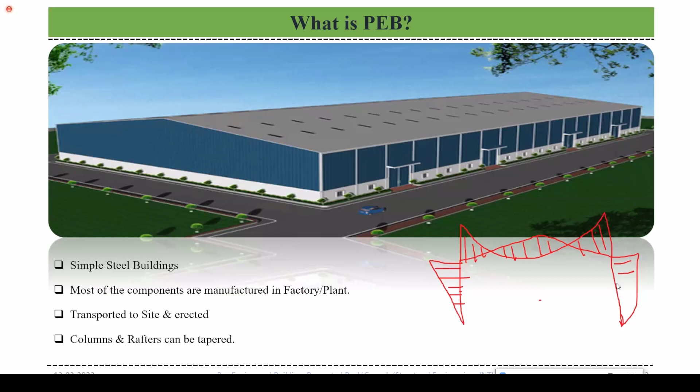Suppose I am taking a 2D frame structure like this. So for dead load, the bending moment of the structure will be like this. The shaded area is the bending moment diagram.

According to this, the PEB column or rafter will be designed. For example, here the bending moment will be much lesser, so the section starts with a lesser depth. Here the bending moment is more, so the section size will be increased like this for a column. For a rafter, the bending moment is more here, and more here.

So you can assume a simple PEB structure has a shape like this. This is about PEB, compared to the conventional steel structure where all columns and rafters are straight. They use hot rolled beams or straight sections, which are heavier compared to PEB.

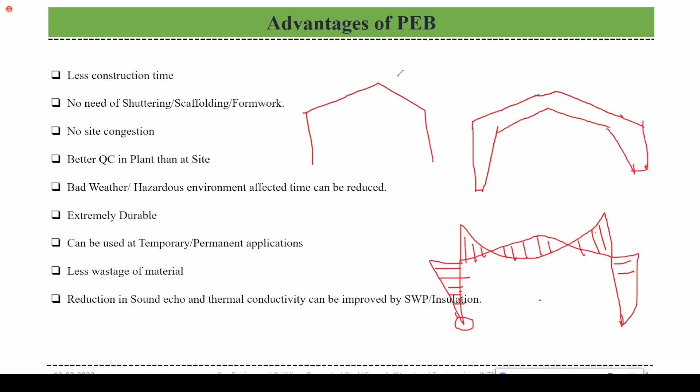Next, the advantages of a PEB structure. The first advantage is less construction time. Most PEB components are manufactured in a plant or factory, then directly transported to the site and erected using simple connections.

But in RCC, temporary shuttering, scaffolding, or formwork will be done, then concrete is laid, and there is time needed for setting of concrete. In PEB structures, there is no time needed for any setting, so there will be less construction time compared to RCC structure.

The other point is no need for shuttering, scaffolding, or formwork. No temporary structures need to be erected for setting any PEB component, because all these components are made in the factory only and erected directly. There will be no site congestion.

As you can see locally, there should be some aggregate and cement bags, there should be some site setup. But in PEB structures there is no site congestion, because components come directly from the plant and are erected. Better quality control can be done in the plant than at site, so there is no worry about supervision at site since all components are made in the factory itself.

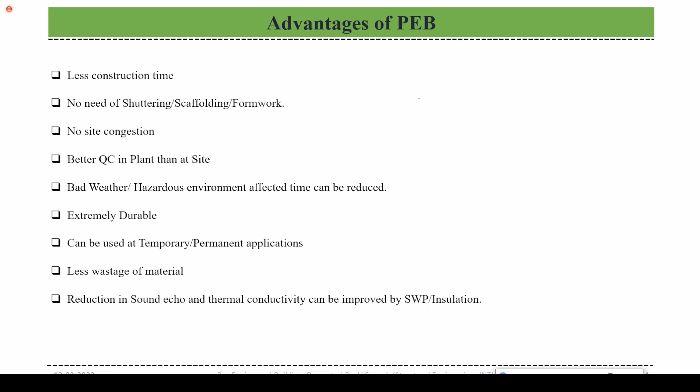The reduction in sound echo also has been improved. Generally if there's any sound in a steel building, people think there may be resounding echo that isn't pleasant to the ears. But this reduction in sound echo can also be improved by sandwich panels or insulation.

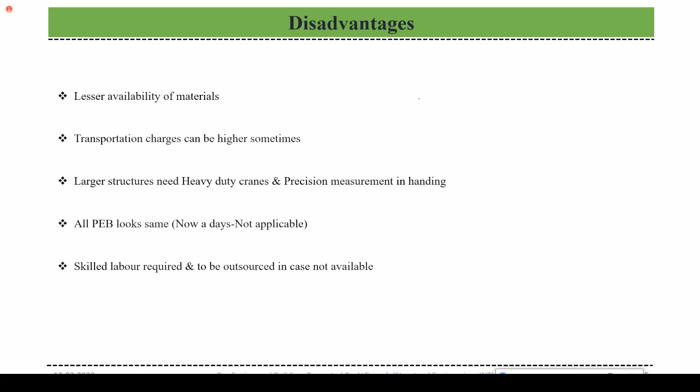The last point is that skilled labor is required and must be outsourced if not available. In an RCC structure, all kinds of labor may be welcome there. But here, for erecting the steel building, we need skilled labor, because he has to measure precise dimensions while connecting the bolts—connecting the column to the rafter or crane beam to the bracket. He has to be much more skillful than the labor required in RCC buildings.

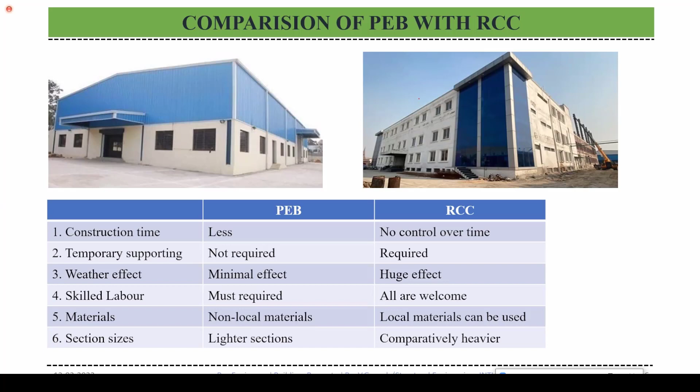And the main point is the section sizes. In the PEB building, as I told you, it is nothing but frames. We have to design according to the bending moment diagram. Where there is more moment, the section may be higher, and where there is less moment, the section may be lighter. So in PEB, we design according to the bending moment diagram, so all these are lighter sections, whereas in RCC, all are straight. You can see many RCC structures, so these are comparatively heavier sections.

So what are the different types of PEB structures available in our market? First is called a rigid frame. You can see only two columns on both sides and one complete clear span rafter over these columns, so this frame is called rigid frame. For this rigid frame, maximum practical width or clear span can be 60 meters. You can see the taperization of the column or rafter.

I think everyone is following, right? Yes, sir. Fine.

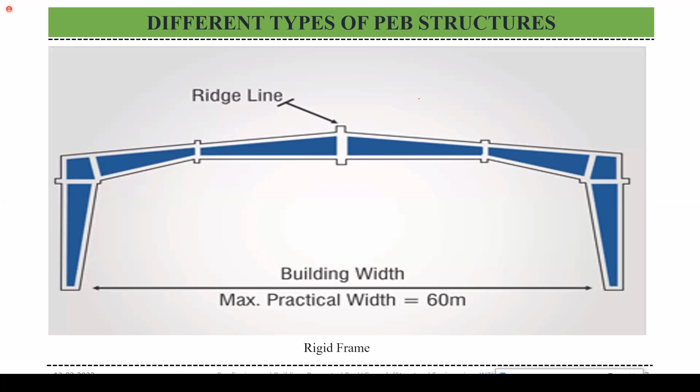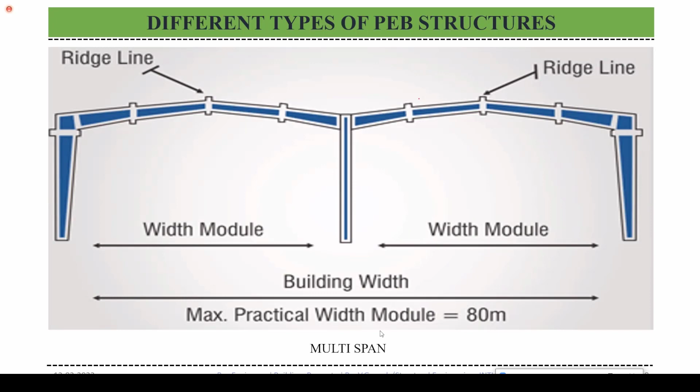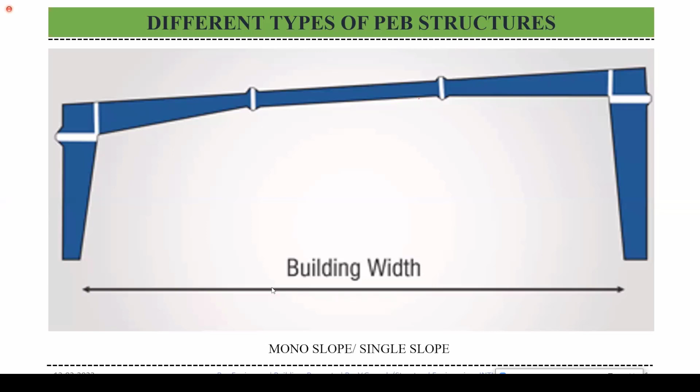And here is the monoslope or single slope building. Generally, some slope certainly has to be maintained in a PEB structure. If you see all these structures, all the rafters will be laid at a particular slope, you can observe here. Why do all these structures have to be laid at a slope? Because we have to drain the rainwater. In case rain comes, we have to drain the rainwater to a particular slope - there may be some gutters and downspouts, which we will learn later in other classes. So we have to drain the water from the higher portion to the lower portion. Therefore, according to some particular codes, minimum 4% roof slope has to be maintained in a PEB structure. This is called single slope because there is no other slope, only slope on one side, so you call it monoslope or single slope building.

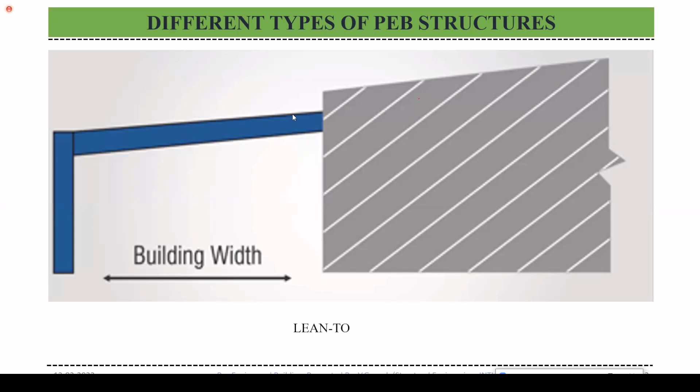Another one is a roof system. Roof system is nothing - previously we have seen a complete building with steel, but here you can see these columns are with RCC, and they have simply provided a rafter over the RCC columns. So we are providing only a roof system here - there are no columns or girts, anything. We are providing a rafter along with purlins and sheeting above, so you can call it a roof system.

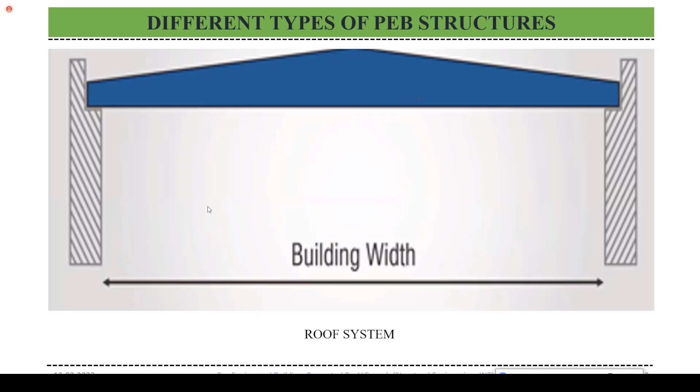This is a familiar structure most of you know, because if you go to a petrol bunk and look technically at the structure, you can observe this. This is called a T canopy because it has the shape of a T, though most people call it a Y canopy - but the correct technical word is T canopy. The column is fixed at the base and there are two rafters on either side of the column. This is generally observed in parking lots, petrol bunks, and railway station platforms.

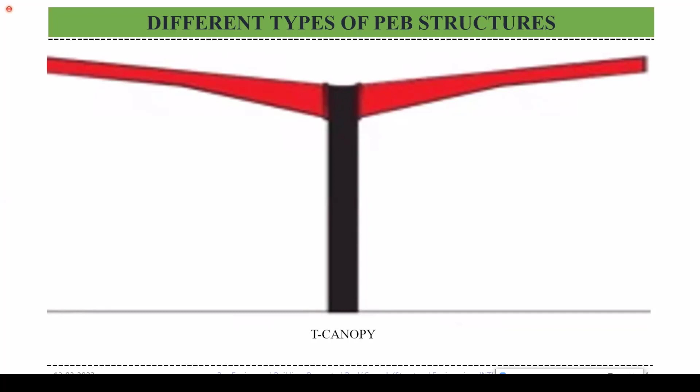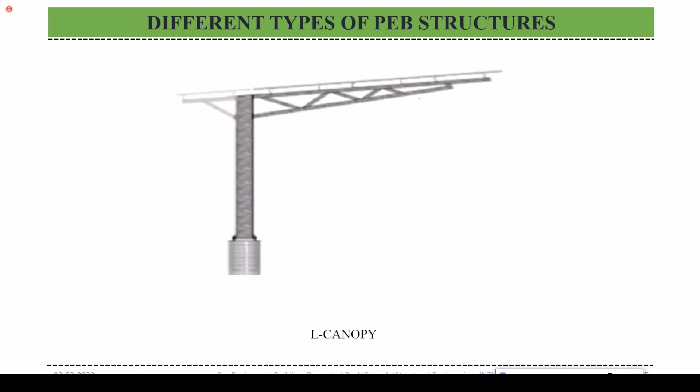If there is only one rafter fixed on one side of the steel column, you can call it an L canopy. You can observe this generally in bus stands and railway station platforms.

The last one here is the flat roof structure. The terminology itself indicates it has a flat roof. The flat roof will be laid with concrete, as you all know. So most of you probably doubt - if it's concrete, where is the purpose of steel? That's the thing we'll address.

You can see brown color lines here - these are the frames, nothing but flat roof frames, we can call them. You can see my cursor here - these are the joists, some you can see truss-like structures. These are the joists, simply supported between these two beams. Nothing but mezzanine frames - you can call them joists.

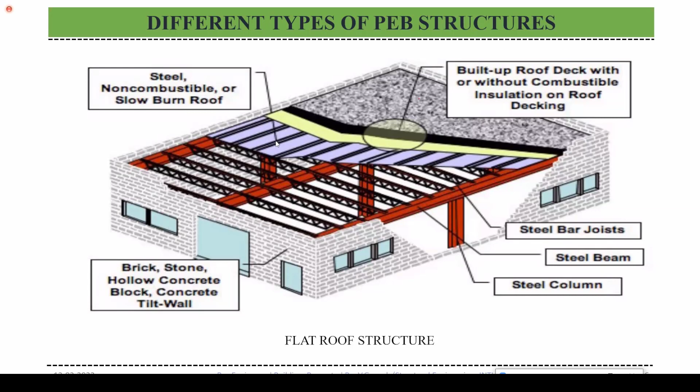Over that, there will be a deck panel. Generally in RCC structure, before laying concrete, RCC contractors will provide a deck sheeting, decking. So similarly in this case, we provide a deck sheeting. Here you can see the line of the deck sheeting - they've cut a section here, you can observe this is the deck sheeting. But in RCC structure, after the concrete sets, they remove the decking. In the steel building, they keep it as is, because they pour concrete directly over the deck sheet. This is simply called a flat roof structure.

These are the different components involved in making a PEB structure. The first one is the frame - I think all of you have seen different types of frames: rigid frames, beam column frames, single slope, flat roof, and all these are frames. This has to be connected on site using base plates with anchor bolts, and a column and rafter has to be fixed with a connection plate. So all these components, and then third one, purlins or girts and struts.

What are these purlins, girts and struts? We'll see in the next slide. Next, bracings, roof and wall sheetings, flashings, and miscellaneous accessories like skylights, wall lights, doors, windows, louvers, roof fan curbs, ridge vents, roof monitors, etc. What are all these? I'll tell you in brief. And building additions like fascia, canopy, mezzanine, crane, internal structural partitions, etc. I'll show all these in a particular practical building so that you can recognize them whenever you see them.

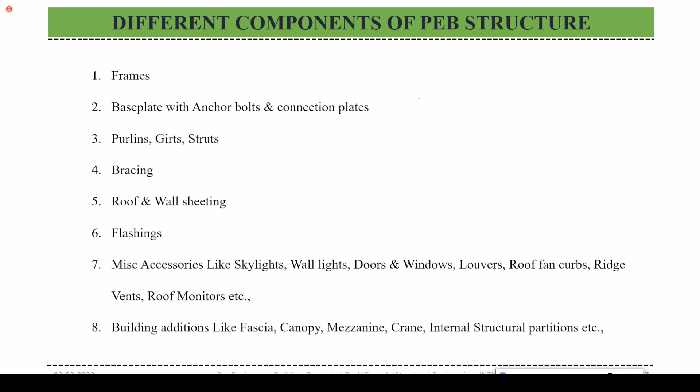So this is a purlin or girt section. You can see here it is like a Z section. Why do we need to use Z sections? Most Indian contractors or consultancies will use C sections also, but most people will use Z sections. What is the purpose of using Z sections? Because at the end of these sections - why I'm talking about the ends - you cannot transport, suppose if there is a 120-meter or 100-meter length building, you cannot transport a 100-meter length purlin entirely directly to site from the plant, because that much length of transport may not be available.

So you have to send them in pieces, some particular 9 meter or 12 meter length pieces, to the site. So if it's a Z section, at the end of the section you can directly lay another Z section over it - you can visualize the end of the section for lapping. Technically we call it lapping at the end of the Z section. If you want to carry it to the other frame, you can directly lay a Z section over this, so that you don't disturb the connection. And then this will be called a strut - a strut is nothing but, I'll show you.

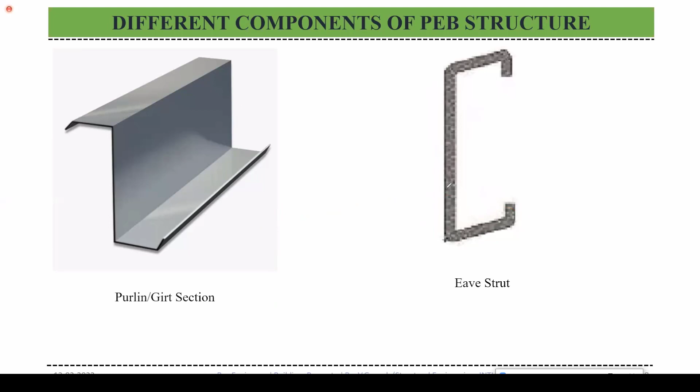The next component will be bracing. What is the purpose of bracing in a PEB? Bracing is a component which is used to transfer lateral forces only. What are the different types of lateral forces generally found in a PEB building? We'll see in the later stages, but as of now, you can say wind force.

Suppose through the length of the building, how can the wind force be transferred? This wind force can be transferred by using the bracings, like that you can see. And I have told you there is strut here, at the top of the rafter, we can say that as strut at the complete side of the building. There are two types of bracing: generally we use diagonal bracing and knee bracing, and the other one is portal bracing.

So what is diagonal bracing? You can see here, you can use some rods, solid sections like 16mm, 20mm, 24mm rods, or cables as diagonal bracings. Otherwise, if there are any particular doors, if there is a rod bracing, you cannot enter into the particular structure, so we cannot use rod bracing if there is a door. We have to go for portal bracing. This is the portal frame bracing, we can call it. We have to use portal frame bracing in case of any doors, etc.

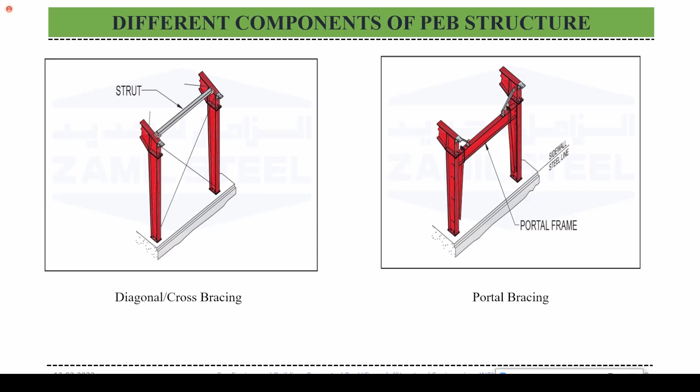I think most of you know what a sandwich burger is, right? There is a bun below and a bun above, and there will be stuff in between, like most people eat it. So like that only - there is a top skin and a bottom skin and an insulation panel in between them, so we can call it a sandwich panel.

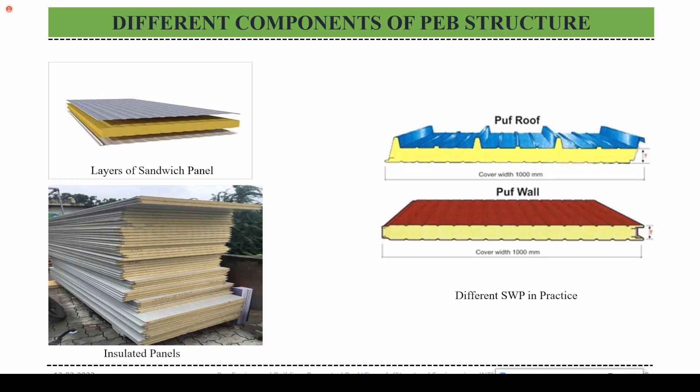Otherwise some people will use only a top skin, and without a bottom skin you can directly use an insulation panel. That is a client's preference. And there are some miscellaneous other components in a PEB model.

And I have told you there are some flashings. Suppose there is a wall sheeting here and a roof sheeting here, we have to cover this joint, right? We have to cover the gap between wall sheeting and roof sheeting, so we have to put a miscellaneous trim or flashing so it can cover the gap between wall sheeting and roof sheeting. Likewise, the side wall sheeting and end wall sheeting, we have to cover the gap. All these can be called trims or flashings.

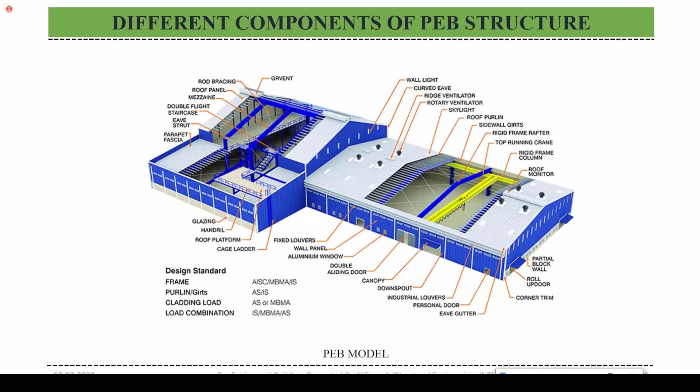So there is some portion of building going over the roof. You can call it fascia, because generally in PEB structures there will be a triangular gable portion. But most people did not like this triangular portion, because it can be simply identified as a steel structure or PEB. So to cover this gable portion, we extend the sidewall portion up to roof height, which is known as fascia. So if you see any side of the PEB building with fascia, it looks like a simple rectangle building. You cannot observe any gable or triangular portion if it is having fascia.

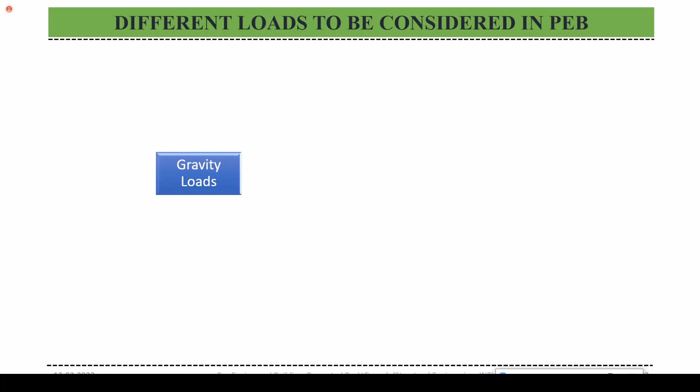And then what are the different loads to be considered in a PEB? There are three types of loads mainly considered in a PEB. First one is gravity loads, the second one is lateral loads, and the third one is self-restraint forces.

So gravity loads, I think all of you know. As a civil engineer, you have to know what are the gravity loads. There are certain loads that come under gravity loads. The first and main component here is dead load. In the case of a PEB structure, what are the components that tend towards dead load?

First of all, the higher portion of the PEB building is the roof sheeting, so there is some particular weight for every sheeting. The next portion is purlins, generally used to support the sheeting. So we have to consider the load for sheeting as well as purlins, and the weight of these two can be considered as dead load. And the main other thing is self weight of the structure itself, nothing but self weight of the frames or columns.

And then the other thing, live load. This is the next main component in gravity load. There will be some maintenance for every PEB building; they should be properly maintained and corrosion proof, because we need more durability. So we need to paint it thoroughly, so for maintenance some men will take care of the work. For that, we need to add live load. Generally in a PEB structure, the live load ranges from 60 kg per meter square to 100 kg per meter square. How this live load can be applied, we'll see in the design in the next lecture.

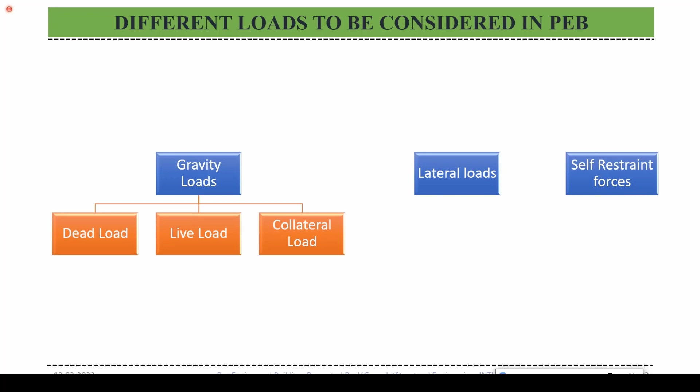Next, coming to lateral loads. What are the lateral loads? Generally we observe lateral loads in a PEB structure, first the main thing is wind load. Generally in case of RCC, up to G+2 or G+3 structures, we do not consider any wind load. But in PEB structure, for any building with any height, maybe 2 meters, 3 meters, 10 meters, 17 meters or 20 meters, for any height we have to take wind load into action.

And the next thing, seismic load. This is the main difference. There will not be any seismic check generally for G+2 or G+3.

In the PEB, we will design the PEB structure according to the seismic loads also. And the last one, self-restraint forces.

I think most of you did not know about this. What are the self-restraint forces? Because in case if you take an RCC structure, there is only a huge amount of concrete and there will be steel, a lesser amount of steel when compared to the concrete. So there will not be any temperature effect there.

But generally, steel constructions or steel materials have higher thermal expansion than an RCC structure. If the temperature is more, the steel tends to expand, and if the temperature is below the room temperature, it tends to contract. So generally, all these steel components which are manufactured in plant are manufactured at room temperature itself. So in future, if the temperature is increased, what will happen?

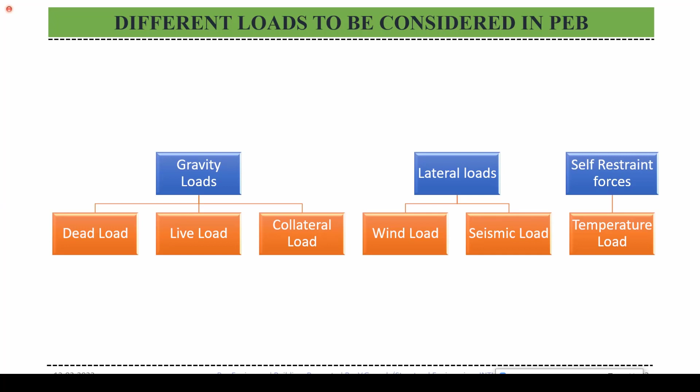So we need to take thermal stress, nothing but temperature load, into account for loading. You can see temperature load in steel structures only. You cannot see them in RCC structures. So how can the load be transferred?

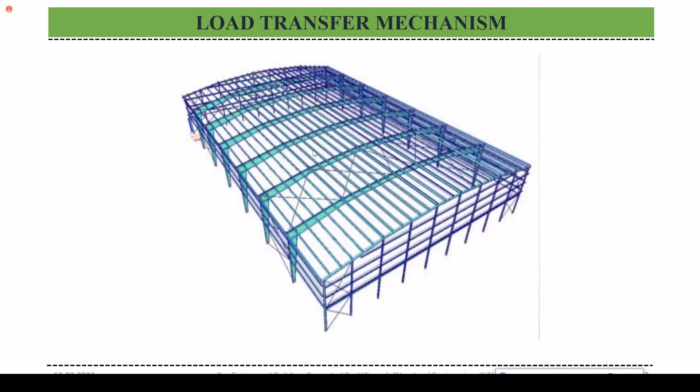But this is all about gravity loads. So what about the lateral loads? Nothing but wind and seismic. Generally wind will act in the x direction and z direction, if we take y-axis as up and x and z-axis as ground. So gravity loads, nothing but dead load, live load, and collateral load, always act gravitationally downward, nothing but y downward. But the lateral forces act in the x direction and z direction.

So these forces can be transferred by using roof bracings and wall bracings. Here you can see some X type portions are there. These, if we use them at the roof, you can call roof bracing, and if we use them at the wall, you can call them wall bracings.

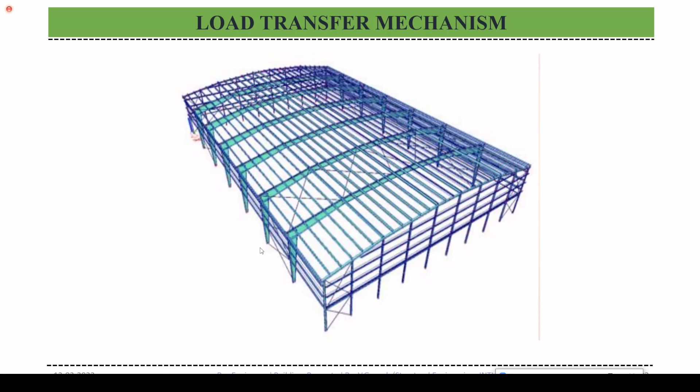And then these are the various tools available for a PEB design. The first one is StaadPro. I think all of you have basics about StaadPro in your BTech career itself. This is a structural analysis and design program which is generally used for design of any RCC or any structure. You can use it. So generally the main tool here is StaadPro.

And the next one, Staad.Pro advanced tools like Tekla Structures. This is an advanced tool which, when compared to StaadPro, can directly model, and also you can extract drawings from it. And the third one, MBS.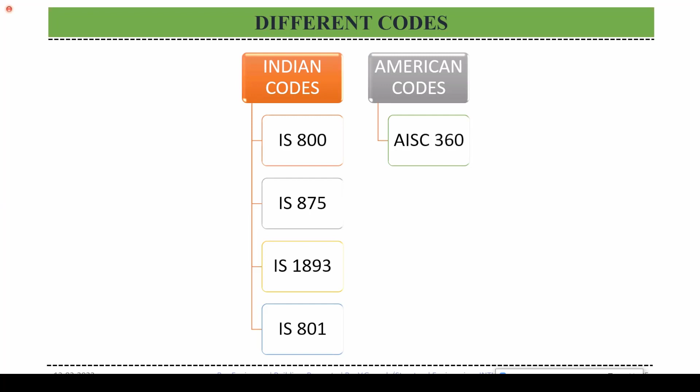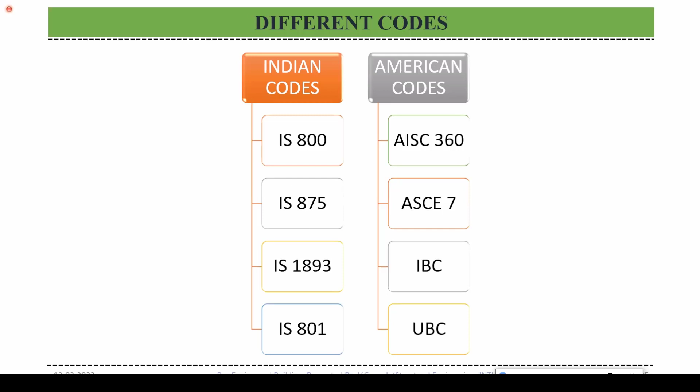There is a code for all the structural steel specifications called AISC 360, which is the design specification for structural steel buildings. Everything will be there in AISC 360. The next one is ASCE 7, American Society of Civil Engineers. 7 is the reference number, and there are many revisions, with the latest being revision 16. ASCE 7 is the specification for minimum design loads for buildings and other structures. It's an American code specification. The other ones are IBC, International Building Code, and UBC, Uniform Building Code. We have to use these codes in American Code design for PEB.

So I have taken references from these codes. AISC 360-05. Generally, in modern days we are also using the 2005 code itself, but there is a latest version, AISC 360-16. Most clients still prefer to use the 2005 code only. And ASCE 7, as I told you, is for minimum design loads for buildings and other structures.

The other thing is MBMA, Metal Building Manufacturers Association. This is a different association compared to AISC and ASCE, American Society of Civil Engineers, and other steel contractors. They formed a society, the Metal Building Manufacturers Association, and developed a manual based on ASCE 7 only. Next, you have to observe IS 875.

IS 875 is the code of practice for design loads. There are parts 1 and 2 for dead loads and superimposed loads. You have to choose part 3 only for design of PEB, because parts 1 and 2 will be different, used for RCC. There will not be any use of parts 1 and 2 here, but you have to use part 3 for PEB structures, which covers wind loads on buildings and structures.

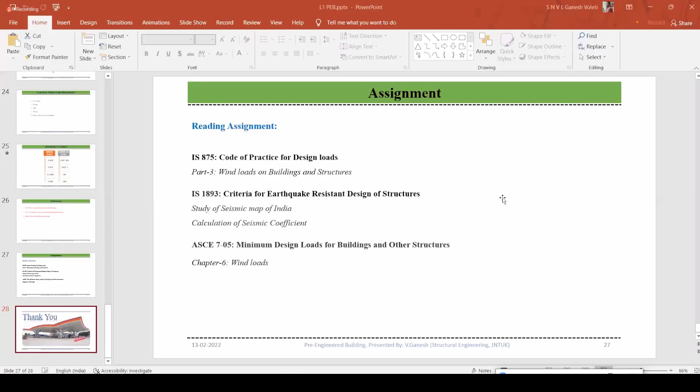Someone asked me to show a practical building which is designed in STAAD. So I want to show one particular example. There are two types of frames, I think all of you know.

You can see here, right? Yes, this is the STAAD Pro user interface which I am using, the Connect edition, and this is the plane frame, nothing but a 2D frame, where loads applied in the frame will be in the XY plane. This is a 2D frame I have designed.

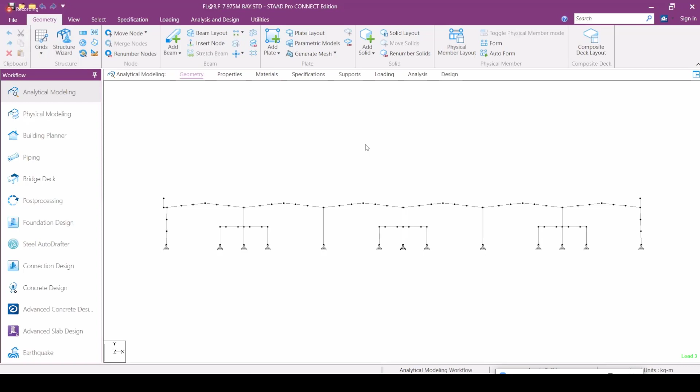So these are generally the loads we apply like this. What load cases are we using? I'll tell you in the design. Like this, we have to apply all the loads. This is the live load and this is the collateral load. Wind loads we apply like this.

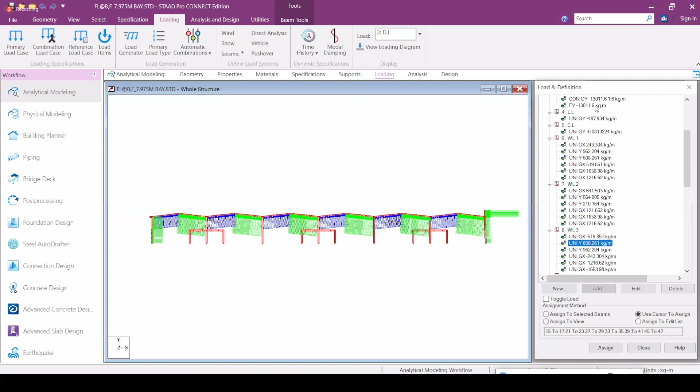Okay, this is the one frame I have designed. This is the 2D frame I have designed in STAAD.

The other thing, there is a 3D frame here. Yes, this is the 3D frame I have designed in STAAD.

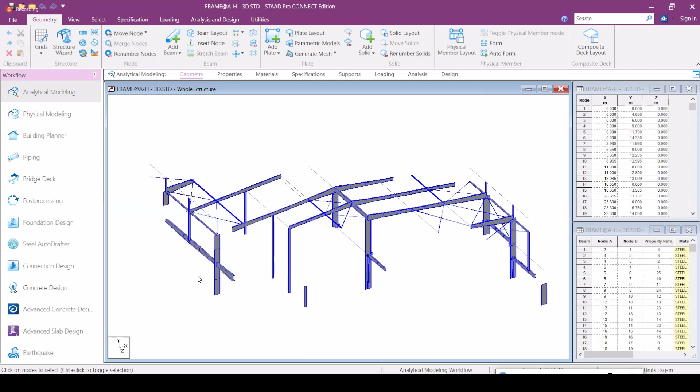We can call it jack beams. You can see here, these are jack beams. So how we can use jack beams, and at the sidewalls we can call them wind girders. How we use wind girders along with portals, we'll see in later classes.

In the next classes we'll see introduction to STAAD Pro, what features are available, what modifications are done in STAAD Connect edition compared to V8i, and what different features are available in STAAD Connect edition.

There are some certain methods available for analysis of beams and portal frames. There is the analytical method, nothing but you can directly apply loads in the user interface itself.

And there is another thing in STAAD editor, nothing but like writing a program, some certain thing like C or C++, you can hear about all these things in CSE. It is the same thing, you have to write a program to analyze a beam or a portal frame. How to write a program in the STAAD editor method, I'll let you know in the next classes. All these things we have seen as an introduction to the PEB industry in this class.

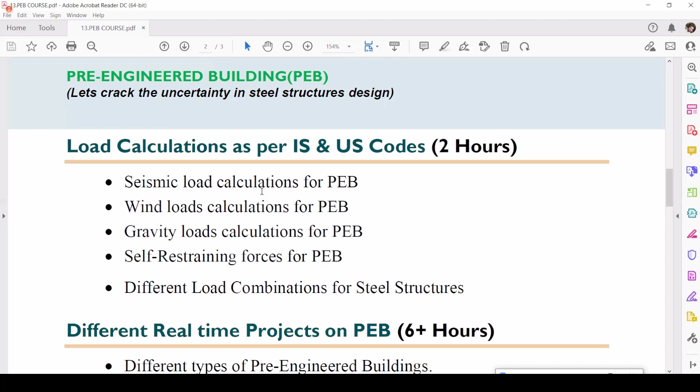The main thing is load calculations. What load calculations are involved in PEB, how seismic coefficients can be calculated, how wind coefficients can be calculated. We cannot apply wind directly to the column or rafter itself; there are some certain coefficients for walls and roofs separately. So how we can apply all these, we'll see in later classes.

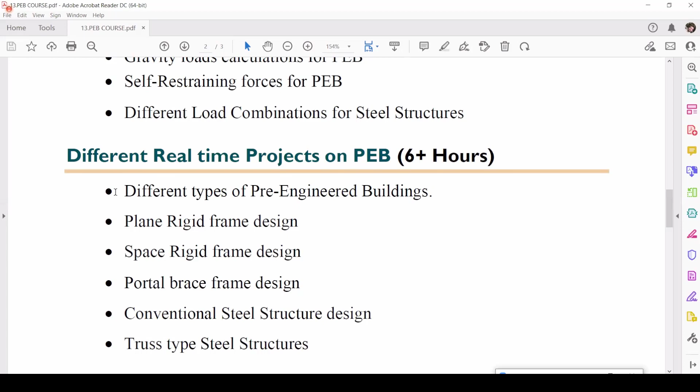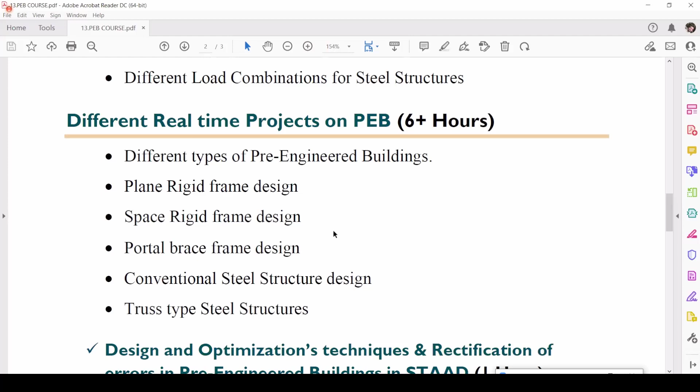Self-restraining forces, how we apply all these things, and what are the different load combinations of steel structures using different types of codes, we'll see. And what are the real-time projects I have done, I'll show you some examples of how to design a plane rigid frame, space rigid frame, a 3D building with space rigid frame, a portal frame design, and conventional steel structure.

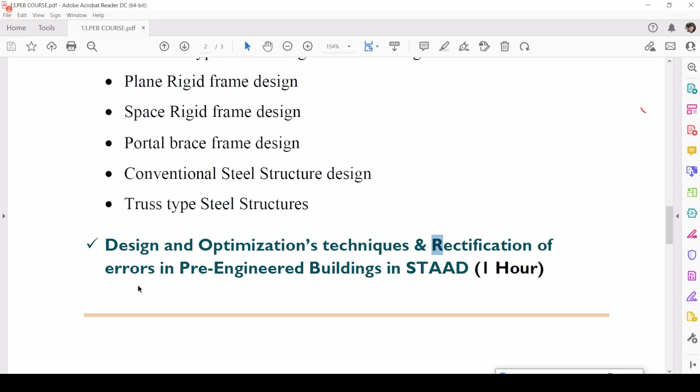What is the difference between conventional and PEB, and what truss type steel structures we can do. The main thing is PEB is all about optimization, how much optimized we can do. So how you can do optimization, what are the different techniques involved, and how to rectify the errors which most people face in STAAD Pro. We'll see how to rectify all these errors in the later classes.

Is there anything else in this introduction class you want to know?

Sir, as we discussed, roof sheeting. Yeah, hello. Roof, sorry, your voice is causing some disturbance, can you tell me again please? How roof sheeting is economical than the normal ones? Like while casting of our roof, we are placing roof sheeting, right? Sorry, I didn't get you. While casting our roof, we provide the roof sheeting, right?

Yeah, roof panels. How is it economical than the normal process like shuttering and other things? You want to know how it will be economical, right? Yes sir. Comparing with RCC, yeah? Not like that sir, we are placing RCC roofs with roof sheeting, right? Bottom of roof sheeting, after that RCC was placed. Okay, I think you are asking about a flat roof structure, right? Yes sir. I understood, so how it will be economical, you are asking about? Yes sir.